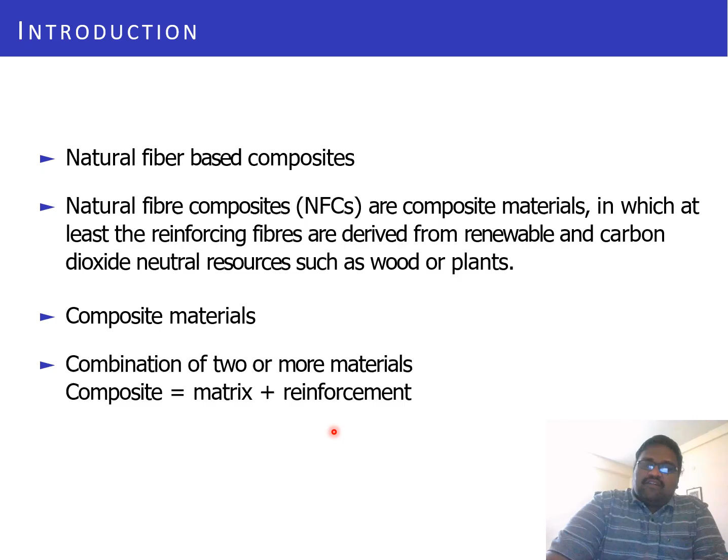Now let us quickly see how composites are derived. There are various types. The first one, MMC, which is none other than metal matrix composite.

The second one is the polymer matrix composites, PMC. The third one is the ceramic matrix composites, CMC, and these three are based on the matrices. Please note these three will be based on the matrices, that's why the matrix term is involved here.

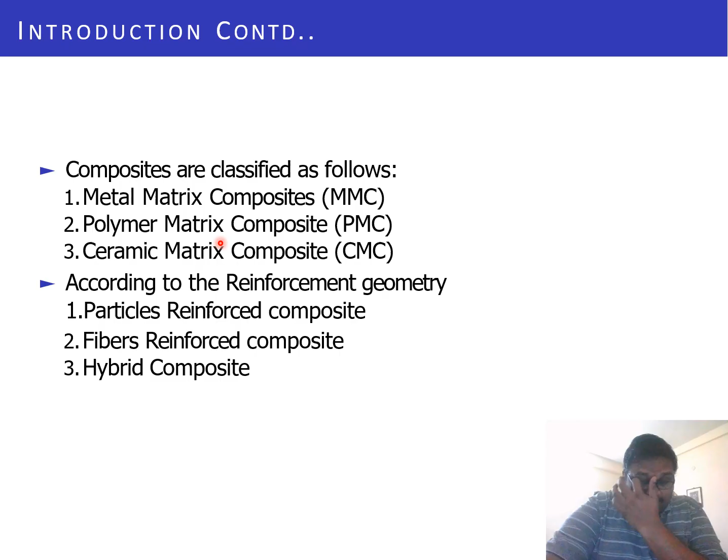The polymer family, you can use a polymer family composite. Then metal matrix, you can use the matrix as different metals derived from various sources. Then this is the ultimate need of the hour, the ceramic, which has high heat resistant capability. But the difficulty in the ceramic matrix is the challenge in the fabrication of the composites. Even though researchers overcome that, quality research is still going on using ceramic as the matrix, which is ultimately the strongest one and has the capability for high heat resistance.

On the other hand, our team focuses on this one. We are more familiarized and expert about the behavior of polymer composites. We worked on using different polymers such as unsaturated polyester. Epoxy is the strongest one, which has high density. Then we have vinyl ester.

Apart from this, we have some quality biopolymers out there like polypropylene, PLA, polylactic acid. All these things come under the biopolymers in such a way that we are able to generate good biodegradable materials. So focusing on the biodegradability concept, we have to go for using those kinds of biopolymers. Most of the biopolymers undergo some chemical processing and are readily available in the market.

Since we basically belong to mechanical expertise, we don't go for deriving our own polymers by adding various compositions. Normally chemists are doing that one, that is their expertise towards that.

Then the next category, as I pointed out, is based on the reinforcement geometry - how the reinforcement you are going to use, how the geometry will be based on that. The first classification is particle reinforced composite. My research team, my research lab, focuses on 2 and 1, these combinations. Let me tell you clearly in my coming slides.

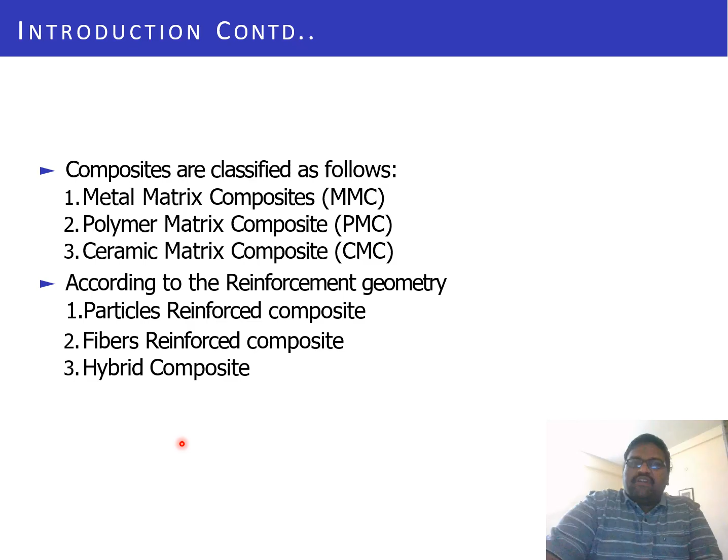Then the third one is the hybrid composites. As you are all familiar with the word, the terminology hybrid, that is the hybridization. You are going to combine one or two fibers, one or two materials, or you are going to combine the fiber with a metal in such a way that you are going to produce a fiber laminate. So all these items come under the hybridization concept, the hybrid composites.

Then the next focus of this lecture session is about the mechanical properties. As specialized persons, we are going to focus on the mechanical performance of these natural fiber based composites. So the mechanical characteristics refer to the various properties and how the developed composite material is going to react towards these properties. Under the mechanical characteristics, the four properties that as researchers we strongly focus on are the tensile strength, the flexural strength, the impact strength, and followed by the hardness.

Let me explain one by one. What is the tensile strength? The tensile strength is none other than the ability of my composite material to withstand the pulling force, to withstand the pulling load. So here I am going to subject my developed composite material to tensile studies, and I am going to discuss how it performs when the load is applied, especially the pulling load. Pulling load in the sense, how we are going to test the specimen is: one end of the specimen is tightly fixed in the grip, and the other end of the specimen is attached with the top load transducer, and now the load is applied.

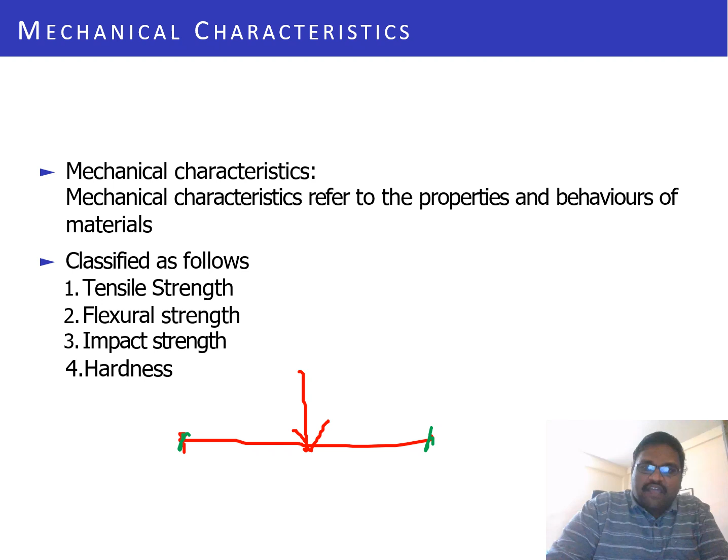Now the flexural, what I am going to do is carry out a 3-point bending test in such a way that I will keep my specimen like this. This is my specimen, and at the center I am going to apply the load, and these two ends are fixed. So that is said to be the flexural load, where it indicates the 3-point bending test. Later on your specimen is subjected to bending, and at one point the fracture will happen. So that is said to be your flexural strength.

Okay, the second one. Then the third one, the impact strength. Impact strength can be done by using two methods, Charpy method or Izod method. Only the direction position is changing, where you are going to keep your specimen either like this or like this. That is the two methods, Izod and Charpy. Now an impact hammer is going to come and crush your specimen, hit your specimen like this. So how much energy your material is able to absorb?

That is the ability of the material to absorb energy, said to be the impact strength. So this one is applied by means of a hammer, the force is applied by using a hammer exclusively. So that is said to be the impact analysis. How much energy your material is able to absorb, it is represented in terms of joules, since we are talking about energy absorption.

Then the hardness, we can normally go for the Shore D hardness, where by using a Shore D hardness tester, I am going to keep the tester over my specimen like this, at different points like this, and the hardness tester will show the value. I am going to press over the specimen surface in such a way that the indenter attached with the hardness tester will measure how hard the surface is. Surface roughness is a different tester. So how hard the surface is, it will show you the value. That way we use the hardness. Here it is a unitless value, we are going to give it in numbers, example 10, 15, 20, like that.

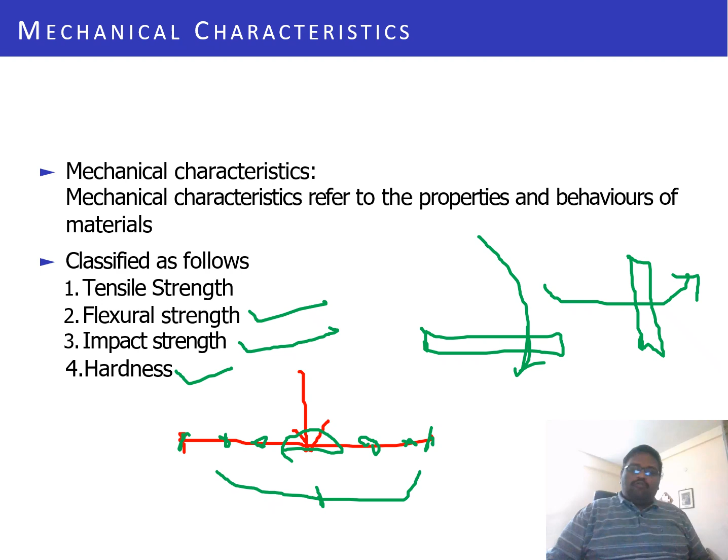But apart from this, we have done studies on erosion also. So in my coming slides, I am going to discuss the results, how we are getting interesting results, based on which you are able to take it forward. You are going to utilize the different machine learning approaches available for your work. Okay, so now let me move on to the further introduction.

And we can use these composites; knowing which type of industry to focus on is very important. So household, structural, aerospace, automotive, construction, and sporting goods are there. In sporting goods, many of the items are nowadays replaced by natural fiber composites. In fact, our lab team members tried one small mini skating board for kids, and it came in a very fine shape. But unfortunately, after a specified time period, it got fractured.

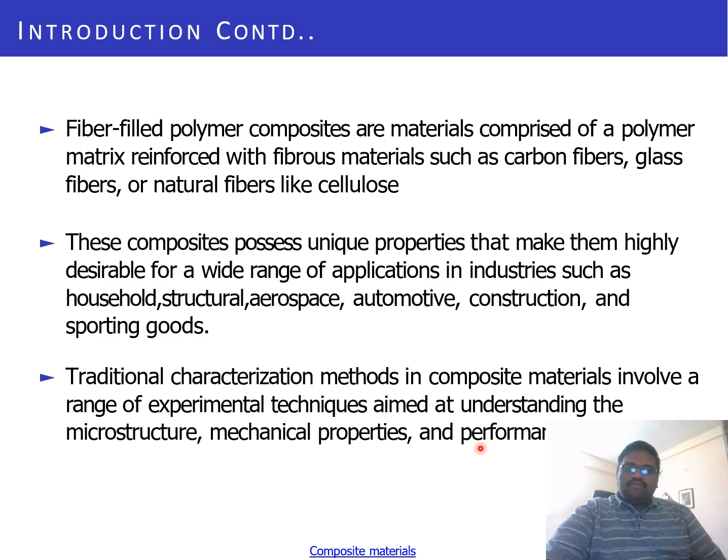So we will face some challenges to make it a commercialized one. And also at the time I didn't get enough good industrial support. That is also a challenge. Okay. And as I told, in the traditional characterization methods, researchers always focus on doing experimental studies of tensile, flexural, and impact. Then they take the failure portion and subject it to scanning electron microscope studies, through which they are able to understand the microstructure, and followed by that the performance of mechanical properties.

Now, in the present day, the industry's major focus is to minimize the use of non-renewable resources and adopt eco-friendly materials by waste use and waste recycling. And the industries are in desperate need of minimizing material waste, because all of us know that material waste will be a very big challenge financially. So we have to be very careful, and that is the current industry requirement. Now, for this, polymer and natural fiber composites are going to be the ideal material, the right choice.

Why? Because they address reusability, they address recyclability, and they tick the box of long-term constancy and widespread accessibility with a very reasonable cost. So these checklists will all get ticked by means of your polymer with natural fiber composites. That makes it the greatest of all time till today.

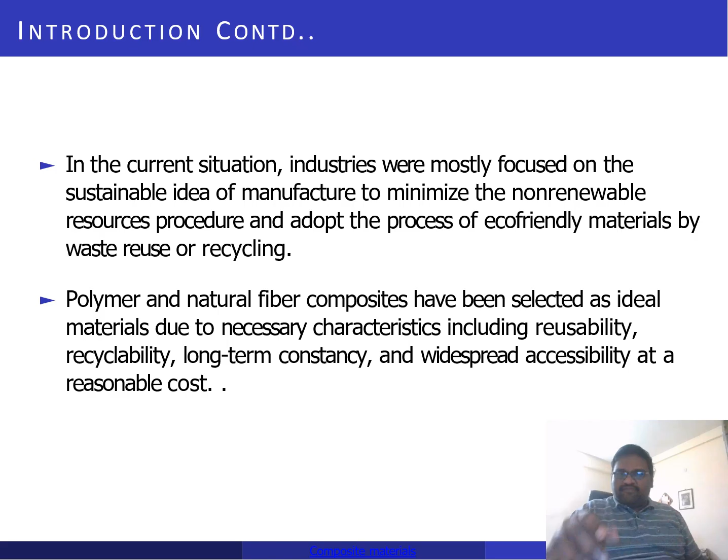Even though lakhs and lakhs of papers have been published by researchers, still the thirst for this combination is there, because day by day new technology is coming. We are in desperate need of new materials with interesting performance. So to satisfy those needs, this combination will exist for another decade also. Who knows? Yeah. Then let us move to the key discussion.

So right now I discussed broadly the composites and the different types, and our focus is on natural fiber and polymer composites, and the property focus is on mechanical performance like tensile, flexural, impact and hardness. Now, how to analyze this using the machine learning approach? First of all, I will give you a brief background about the machine learning approach. It's a huge umbrella under which a number of sub-techniques are there. So we are going to use different techniques from which I am able to understand which composite combination is the best one.

So for understanding this, first, whatever the algorithm, whatever the technique under the machine learning approach I am going to choose, I have to train it with my requirement. If I directly feed, okay, it is not like our calculator. If you put 4 multiplied by 6 and press equal to, it doesn't give 24. It's not like that. First you have to train with your data sets.

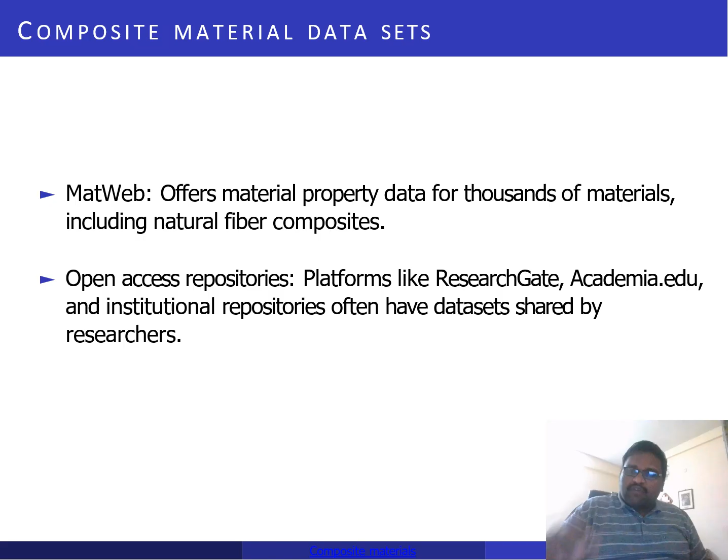And you are all familiar, of course many of you are using this or about to use. ResearchGate is there, Academia.edu is there, Scopus is there, Google Scholar is there. Okay, and by means of more open access, gold open access channels, you are able to get the full paper through the channel portal itself, from which you are able to get the data sets. That data is also with the proper permission. If you want to use other data, the data will be provided by other researchers. All happens in a more ethical manner.

That is very important. And for performing these machine learning approaches, some key papers that I would like to present to you. I don't take much time on this. Just quickly I will throw some inputs. Later on you can also refer to some better papers. In my work line, this earlier published research is very much matched.

So the first one is about the prediction of macroscopic mechanical properties and microscopic cracks. See here the machine learning approach they used is the DNN method, that is coming under your machine learning as a regression model method, and they compare it with the RVE method, and we also used this RVE. Later on I will show you my results, how we obtained them. Okay, so here they are focusing on the cracks, I mean failure aspects, but purely the mechanical property.

Likewise, in the year 2023, another key paper was published using natural fiber reinforced plastic composite. Very interesting. And here they use the deep multi-layer perceptron technique. Interesting technique, under your machine learning umbrella. So here the MLP, sorry, MLP, multi-layer perceptron.

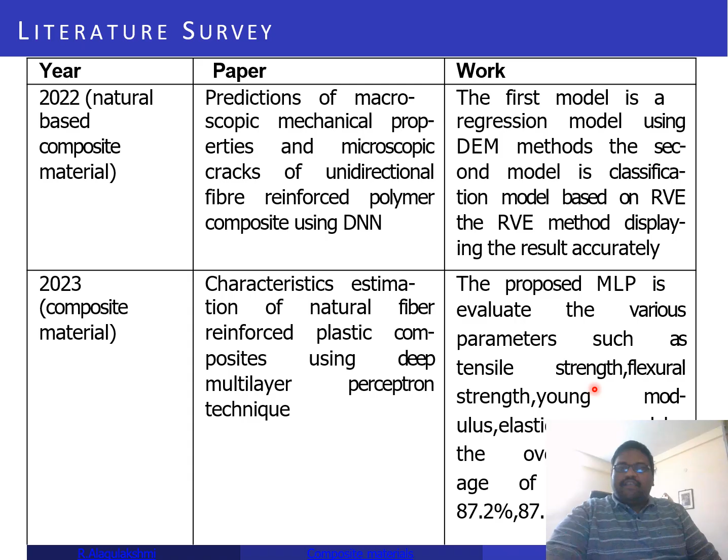It's used to measure the various parameters as we discussed, the tensile, flexural, Young's modulus. Young's modulus and elastic modulus are derived from your flexural and tensile studies itself. Of course, they are closely related to one another. And you see the improvement in percentage they have mentioned, around 87.2, which is quite interesting. That attracts us in our research to use some quality machine learning approach.

And another paper published in the year 2022, where they used the ANN. Please note ANN also comes under your machine learning approach. That is BPNN, SNN, ANN, I mean artificial neural network. Here also they predict the mechanical performance for the green composites, green fibers. This is what I had mentioned as the biocomposites, where they used this type of green fibers for better composite manufacturing. And they used two types of methods, BPNN and SNN, and they focus on three mechanical properties.

And you see the results of accuracy. One of the most important things of the machine learning approach is you are able to compare your experimental results with the results derived through the machine learning approaches.

That is the accuracy compare. So here the accuracy is very good, 96% is there. Then in 2020, based on the polymer composites, how the machine learning is applied. So I am very new, I am late. Right now I am focusing.

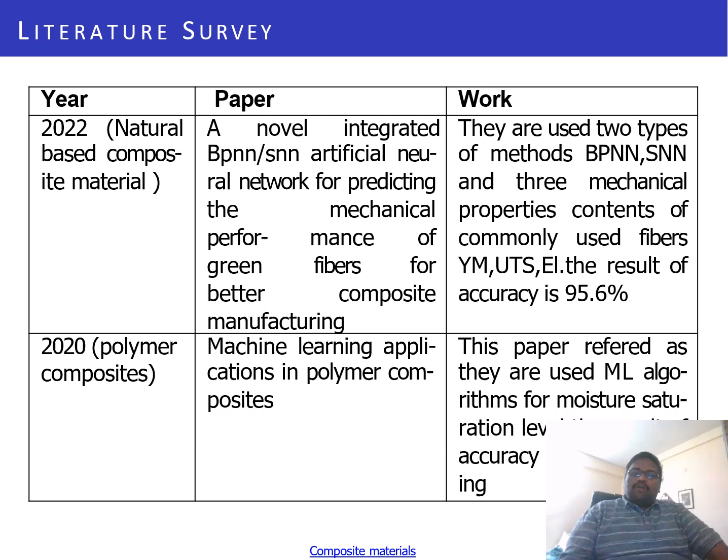But you see, earlier researchers started hardly 5 years back, half a decade back itself, they started using the machine learning approach for polymer based composites. So they used the different algorithms focusing on moisture saturation level, and they also understand a good accuracy. Then the next one is based on the basalt fiber. Here they use SVR method, all those things.

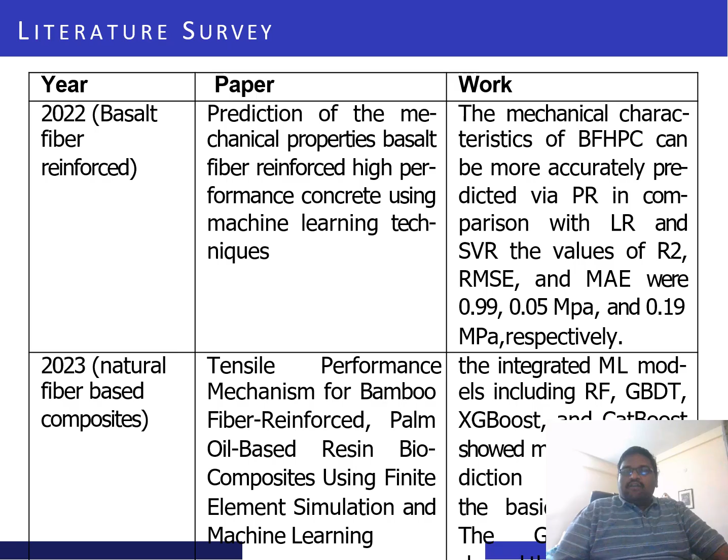Then another one is for the bamboo fiber reinforced and palm oil based resin, like that. They use along with machine learning the finite element method also, through which they are able to compare the experimental results with the theoretical ones. And the next one is another unconventional approach, using the CNN approach, the convolutional neural network. That is another interesting one that also improves the accuracy, gives some good efficiency from the results we are able to understand.

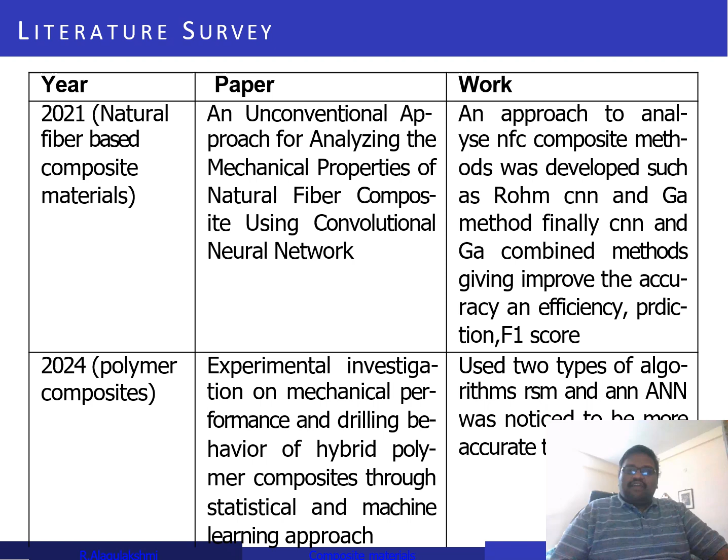Then another one published in 2024 focusing on the machining aspects. That is also very important when we focus on developing innovative products, where the machining also is a part. So that also to understand from the literature.

Now the next interesting thing is, what are all the gaps that we are able to understand based on the literatures that we come across. That is, the lack of real-time analysis is very much missing in the case of natural fiber composites. Okay, and this one will be done by means of your machine learning algorithm. So from the literature, purely with natural fiber mechanical performance alone, and with natural fiber mechanical performance and the machine learning approach, this set of literature. From that we are able to understand the machine learning approach performance.

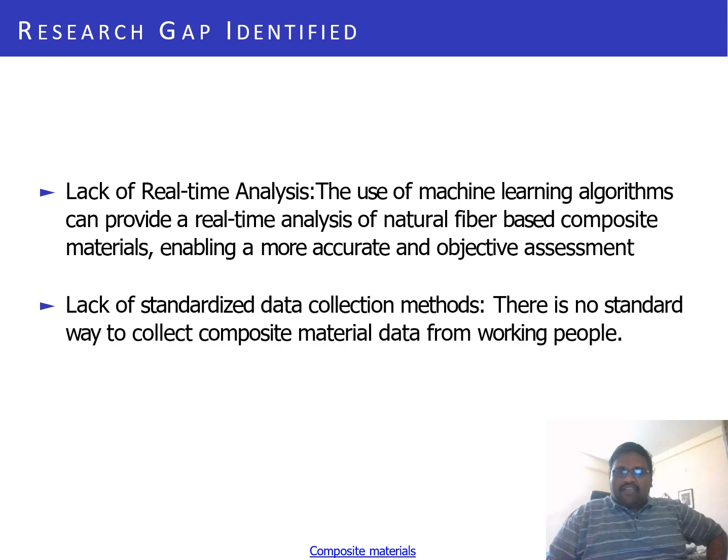And the lack of standardized data, there is no standard way to collect composite material data from working people. This is what I told you, the challenge we face is getting a larger amount of data. Okay, that is the challenge. And what motivation makes us start doing this, that is involving the machine learning approach in the natural fiber composites.

The first one is the high specific strength. As I told you many times earlier, the composite material possesses a better strength when compared to relative density. So this makes them suitable for lightweight applications where the strength is critical. Then the second one that makes natural fiber based composites more interesting is the cost effectiveness. When compared to synthetic alternatives, as I told, glass fiber is the very strongest one. The composite developed from glass fiber, but the glass fiber comes under the synthetic.

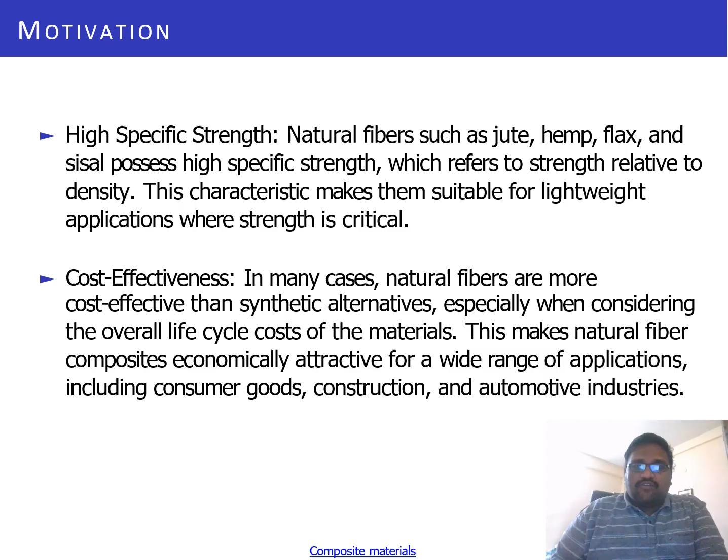So now the alternatives, in terms of strength, are also equal to your synthetics. Okay, and comparing the overall life of the composite material, this makes natural fiber composites more attractive. That includes consumer goods and construction. Yes, of course, I would like to highlight that in the construction sector nowadays more natural fibers are used to improve the quality of wall structures. And in fact people started building houses completely using polymers. Then of course another big sector is the automotive industry where we are using the composite materials.

And this is the objective of our research: to predict the mechanical properties using supervised machine learning. Different techniques we adopt, from the literature only. As a mechanical background person, I am not right now able to develop my own algorithm. As I told, I am in the preliminary stage. Our research is the fundamental one. So by taking the algorithm from the literature, I am going to apply it to the mechanical performance analysis. Then, by using the SEM images, we are going to carry out unsupervised machine learning, and we are also going to carry out deep learning analysis.

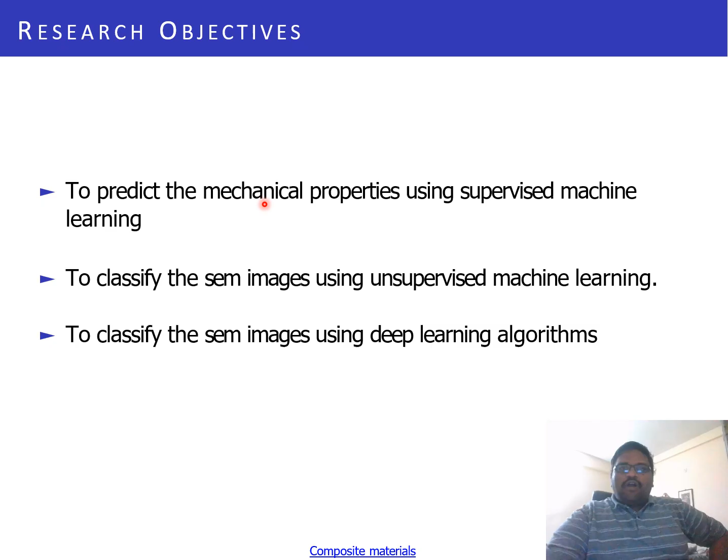And I am going to focus on the first one. The remaining two, based on the time, let me try to cover. For this, I have complete case studies. The remaining two, due to the time consumption, and also we are doing further research focusing on this, I don't have enough results at this juncture, so I will focus on the first one. Yeah.

So let me move on to case study one. In case study one, what we did is we gathered the data of different natural fibers. And for your kind information, since I have been working for more than a decade on natural fibers, right now I don't take any data from the available data sets or online sources. It is our pure original data that we take for the different natural fibers on which we have already done some research, jute, hemp and flax, along with different polymer matrices, as I told, epoxy, polyester, polypropylene.

Okay, and that data mainly focuses on the tensile strength, flexural, all those things. Now, after we ensure ourselves that the data set is ready and what properties we are going to focus on, we are going to focus on four properties. Then we have to decide which type of machine learning approach we are going to choose. So we are going to choose the SVM approach, and decision tree for the classification of various properties,

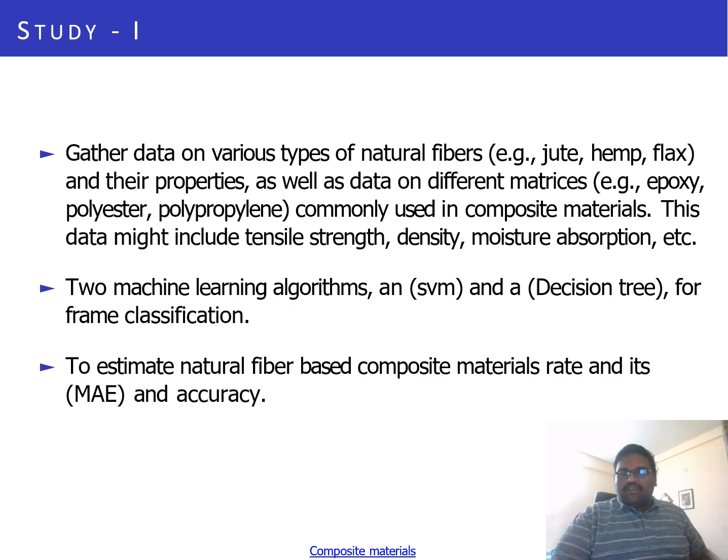from which we are able to obtain a better one. And from this, the outcome we expect to get is the natural fiber based composite material rate and its mean absolute error, and finally the accuracy. The MAE value and how accurate the produced results are, that also we are able to conclude by using this algorithm. And this is the block diagram as I showed.

The polymer composites using different natural fiber and polymer based composites, and the mechanical properties we focus on are tensile strength, flexural strength, and impact strength. All this characterization was done, and we have the data sets. So the input data of different property parameters such as tensile, flexural, and impact strength is given. Then we carry out the machine learning analysis using the SVM method, SVM or decision tree, then evaluate the different composites and compare with the accuracy.

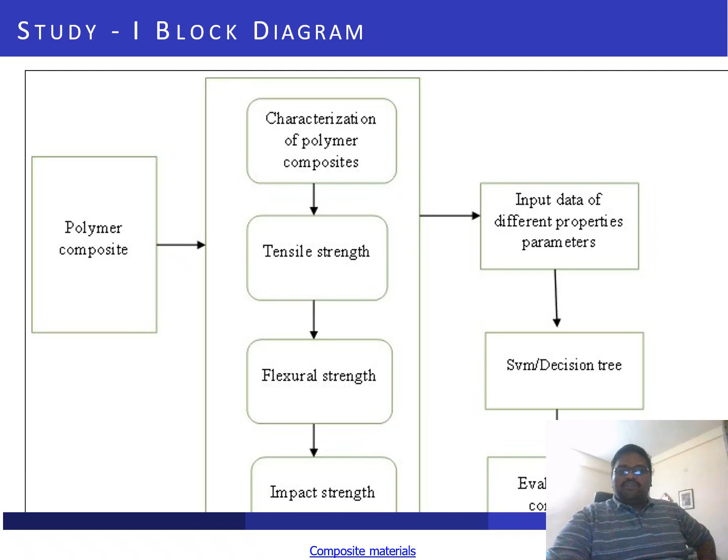Okay, and the material properties in case study one, let me tell what combination we have used: we don't use the natural fiber. Up to my previous slide I generally focused on that one. Now from this slide I am going to focus on the key results that we got. So now the combination I am taking is biochar, which is derived from various waste. The first waste is cashew nut shells. We all take cashew as snacks or for cooking purposes.

Now the cashew is taken from the cover as a seed and utilized for different cooking purposes. The remaining outer cover is thrown away as waste. Now I am going to take that waste, the cashew nut shells, and subject it to the pyrolysis process. I am going to heat it in the absence of oxygen at a temperature of around 500 degrees Celsius, and at this juncture it creates biochar, which possesses good mechanical properties that ultimately make it a good alternative to existing materials.

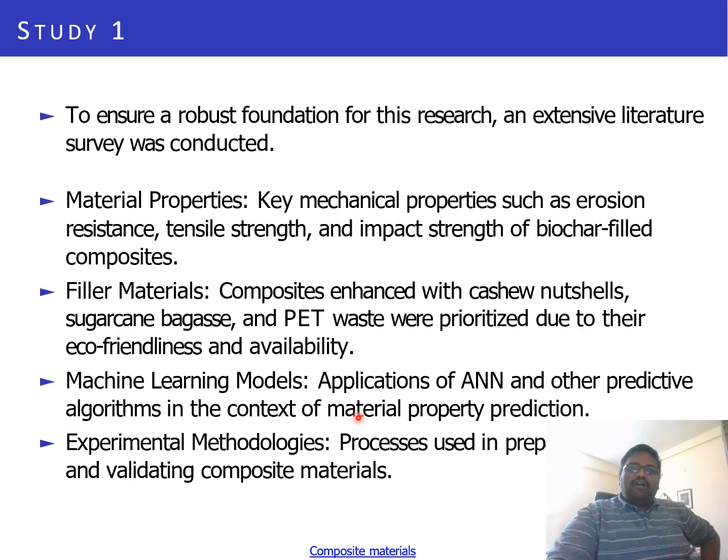Okay, and the experimental methodology used is that we are going to process the biochar with polymers, and we are going to validate the tensile and impact strength of the composites. Now, this table shows the interesting data that I showed, which we used for training.

Now for the different types of biochar mentioned here, cashew, PET, and sugarcane. As I told you, the composites are prepared in three different ways: 5, 10, 15. Now, these 5, 10, 15 values I am going to provide as training data, 18. From that, 12 data are subjected to testing, and out of which 5 are validated. Likewise, for the next combination, the third combination, the different preliminary stages of training, testing, and validation will be done.

From this, what I am going to obtain is the hidden combinations. For example, for this combination, cashew, I told 5, 10, 15% values I am having from the experimental result. Now what is the 6%? What is the 7% value? How much? 8, 9, 10, like that. Like that, we are able to understand the different weight percentages using the machine learning approach. That is the very big advantage of the machine learning approach.

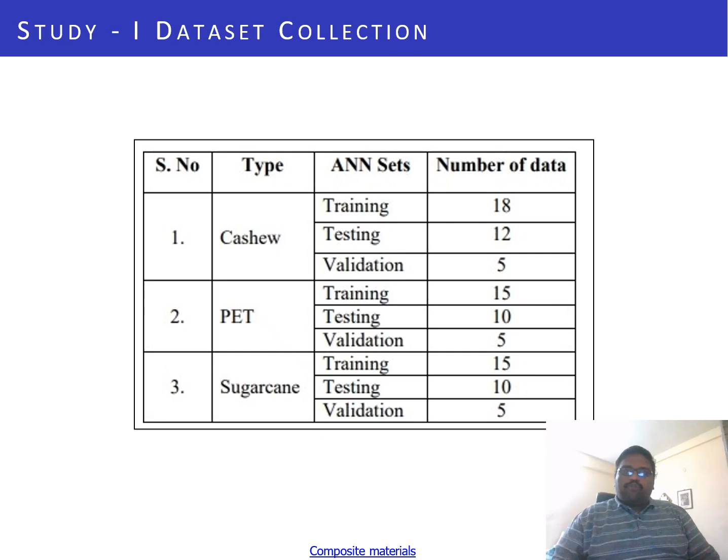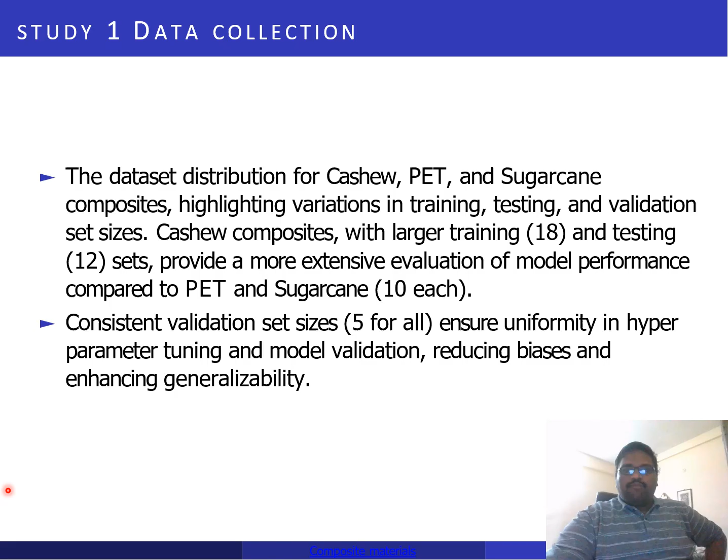So we are able to understand the hidden combination that possesses some interesting properties, good properties, enhanced values also. Okay. So as I told, in the data set shown in the previous table, training, testing, and validation set sizes are given. And here we have the larger training data for cashew composites that provide extensive evaluation, and consistent validation set sizes, 5 for all. This should be maintained uniform in order to ensure the results we got should not create any kind of confusion. So it reduces the bias and enhances the generalizability.

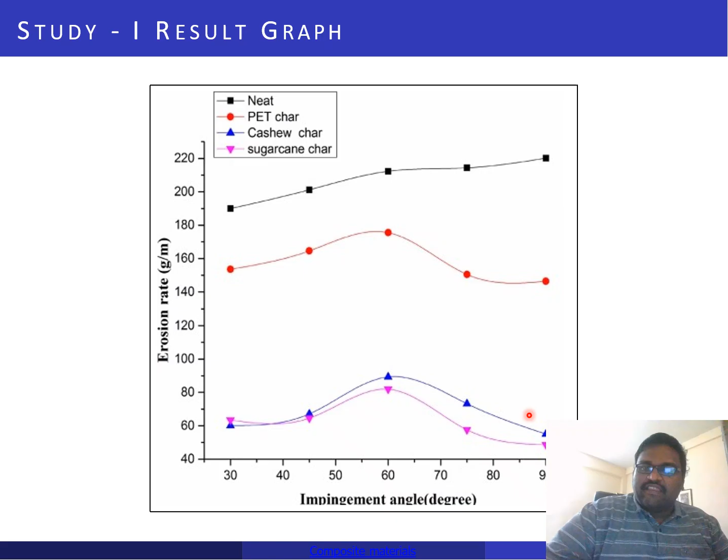So you see, this is the graph for the neat. When the impingement angle increases from 30, 45, 60 up to 90, there is a slight increase in the erosion rate in the case of pure polymer. In the case of the developed composites, better resistance is provided at 45 degrees. Then there is a dip in all three cases at 60 degrees. Followed by that, when the angle goes on increasing, the trend decreases drastically. That is, it possesses good erosion resistance.

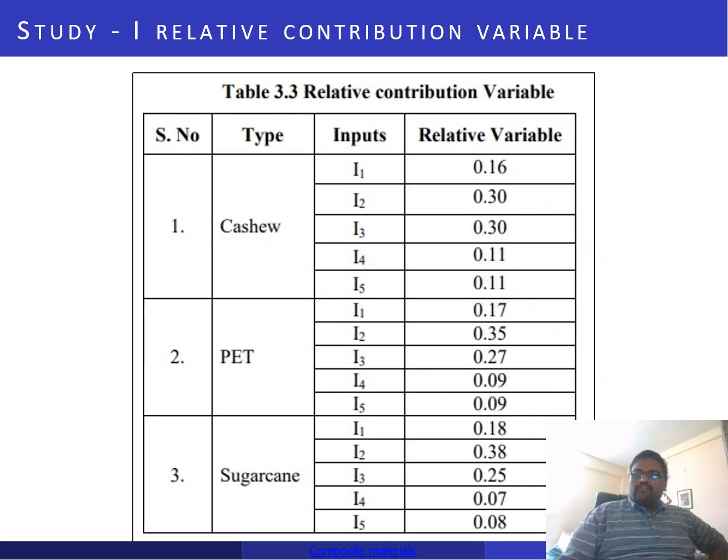Okay, now we introduce this erosion into the machine learning approach, and we find the RCV, that is the relative contribution variable. I1, I2, I3, I4, I5 are the 5 different inputs given for the 3 sets of composites, cashew, PET, sugarcane, and these are the different relative values that we obtained, which are quite good, less than 0.5. It should be within 1. From this relative contribution study, we are able to understand that I2 and I3 are the most influential variables in the case of all three composites.

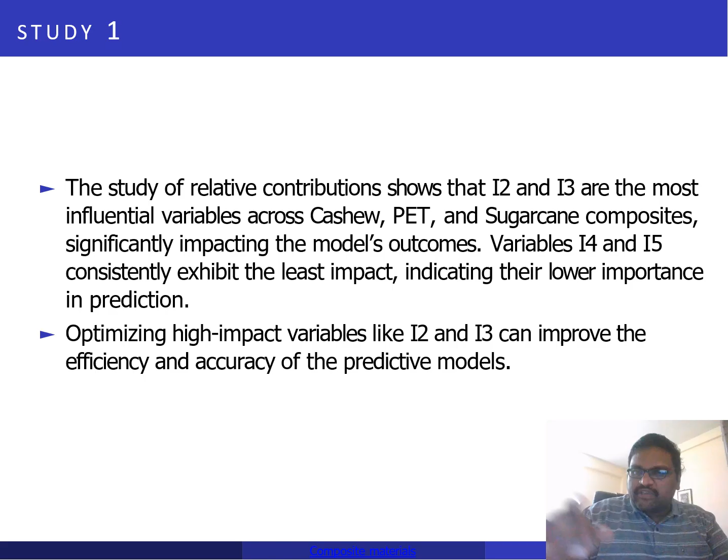Whereas the variables I4, I5 exhibit the least impact. That means their prediction is lower, their prediction is not good. Optimizing the high impact variables I2, I3 can improve the efficiency and accuracy of our predictive model. This is what I told: we are able to get better optimized combinations. I1, I2, I3 indicate the different weight percentages, as I have been telling you from the beginning.

Then the ANN model evaluation comes into the picture. For the cashew-based composite data, it creates a strong correlation, which means it is highly effective in predicting the erosion rate based on the provided input parameters. On the other hand, the PET-based composites model shows a similar strong correlation, but compared to the first one, cashew, it is a little low.

Here also the suggested input properties are well aligned with your prediction. Then the third one is the sugarcane based material, which has the lowest correlation coefficient among the three materials. This indicates there should be some more variations between the training, validation, and testing, or due to the creation of noise that happened during the input-output processing and the input-output relation. We have to check that out.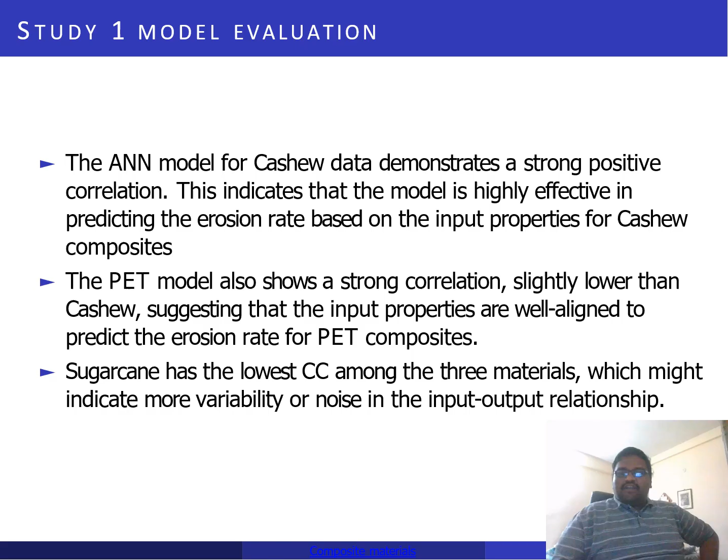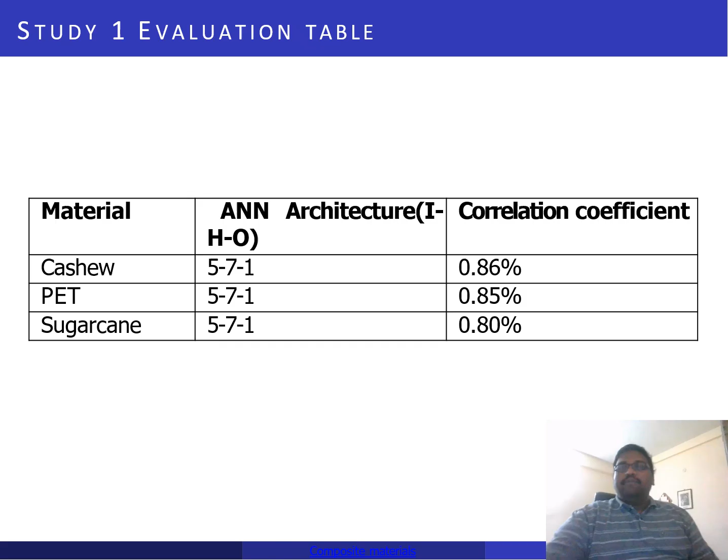This is the evaluation table for the different architecture combinations for the three sets of materials we are using, Cashew, PET, sugarcane with the architecture IHO 571, and the correlation coefficient percentage is obtained and presented here. As I pointed out in the previous slide discussion, the third property faces the lowest correlation coefficient of 80 percent only, when compared to the other two.

Now that first case is over. The second case I pointed out is carrying out unsupervised learning. I am not going to discuss this unsupervised learning with many pictures and results, I am just going to give you the overview, since I am going to focus more on the first objective as I pointed out.

The unsupervised learning is exclusively involved for analyzing the SEM images of natural fiber-based composite materials without requiring label data. We are going to normalize, adjusting the pixel intensity values to a common scale, then carry out noise reduction, because this affects the input-output relation. As we came across in the previous results and discussion, we noticed for the third type, sugarcane, the CC value is very low, which is exclusively due to the input-output correlation. We have to carefully notice all these things.

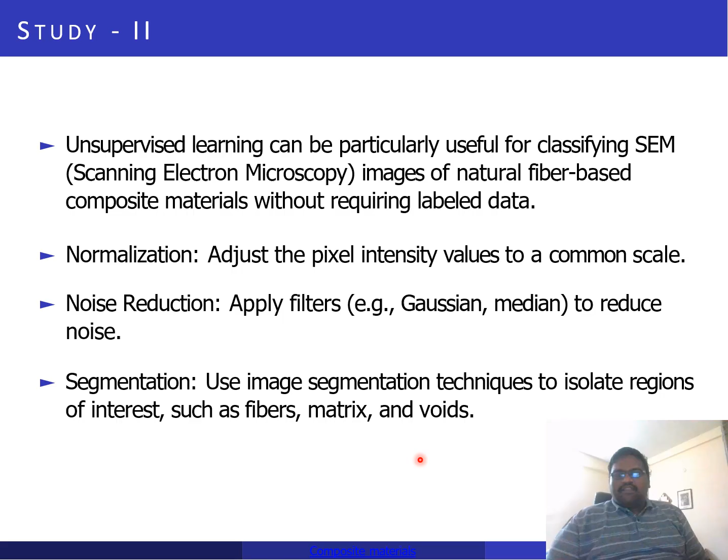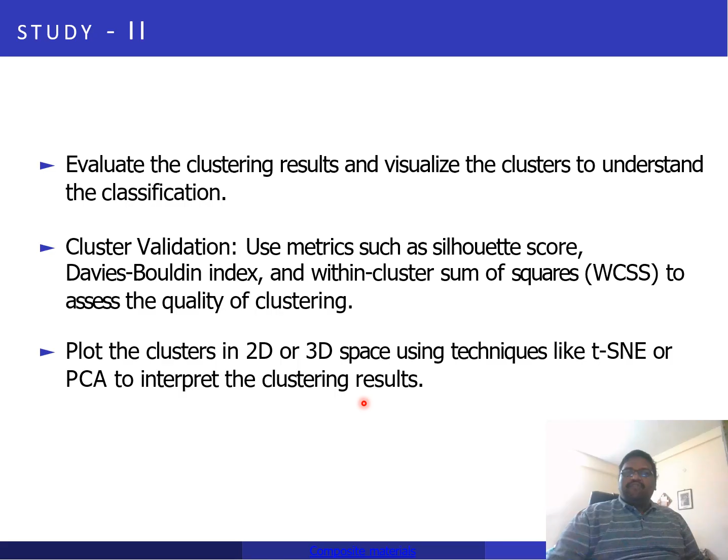The noise reduction done, then we have to carry out image segmentation to isolate which region the failure occurs, which regions give better results, like voids - that is also one factor leading to failure. Then evaluating the cluster results and visualizing the clusters. Cluster validation is also very important, using various techniques like silhouette score, Davies-Bouldin index, and others. This one we have yet to start and get good results. Then we plot the clusters in 2D or 3D space, for which we use techniques such as t-SNE or PCA.

Then the last one, the deep learning approach, we can apply over our SEM images, the largest data set of SEM images that we have on hand for the different composite materials. Here we have to ensure that the training is done properly, and ensure all the images will be given a proper label in terms of defining their material type, defining the defect present, and so on, so that during training the machine learning approach will understand, interpret, and give you the correct output results.

Then you have to do the pre-processing. The pre-processing stage involves resizing, normalization, and augmentation that includes flipping, rotation, etc., to increase the diversity of the data set. Then the next stage is splitting the data. You divide the data set into training, validation, and test sets, typically in the ratio of 70:20:10 or 80:10:10 - that is the recommended ratio to get better optimized results.

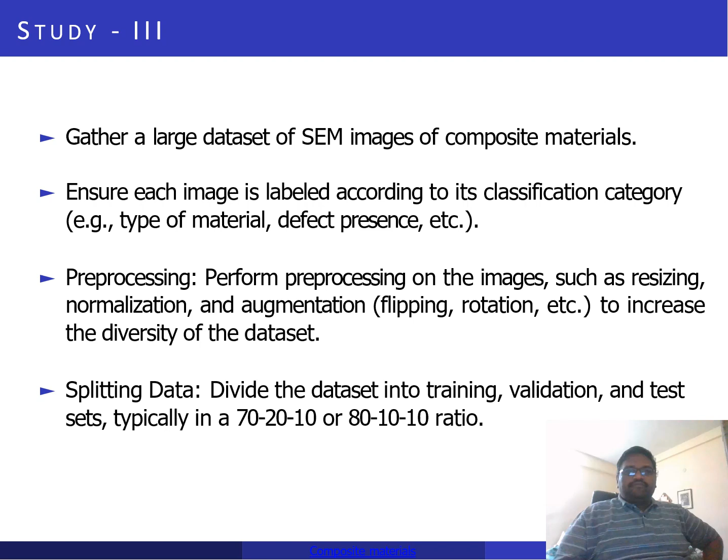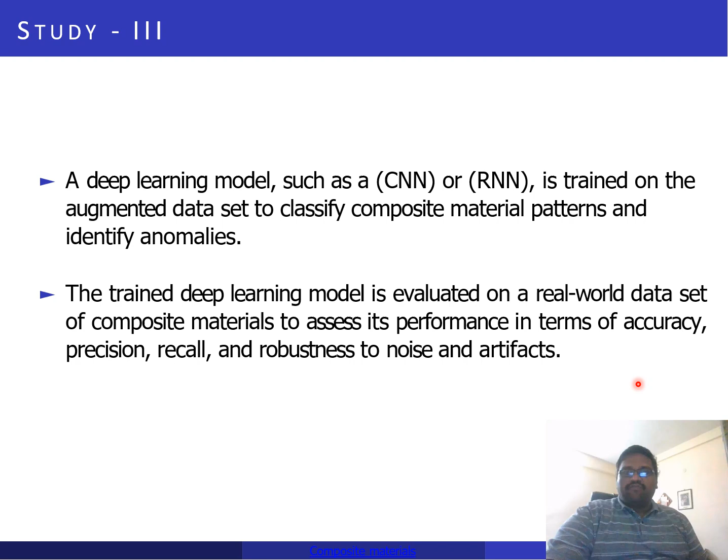Then for performing the deep learning analysis on the SEM images, you can use either a CNN model or an RNN model, where we train the models using the augmented data to classify which composite material patterns we are going to analyze, and to identify the challenges and anomalies. The trained deep learning model is evaluated based on real world data sets of composite materials, so that we are able to compare and assess the performance in terms of accuracy, precision, robustness, etc., to noise, artifacts, etc. This is the continuation of the study too.

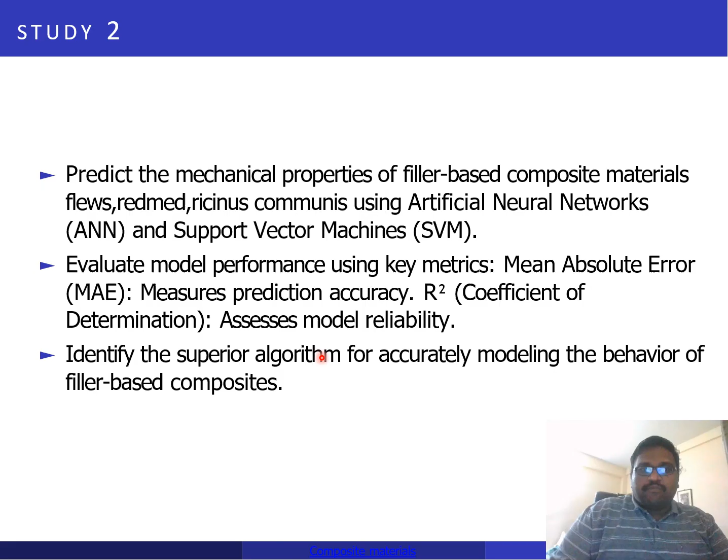We are going to use the artificial neural network and the SVM method.

This one I will skip, I will move to the next part, because there is some repetition in the slides. I'm sorry for that, that's why I skipped it.

Now let us move to the discussion on data collection. The testing will be done based on the American Society for Testing and Materials, and we have the experimental results. From these, the data sets are fed into the training.

Advanced data pre-processing helps make the data sets pure, which does not affect the outcome. Model training is done using the linear regression method, by which the mechanical properties are trained.

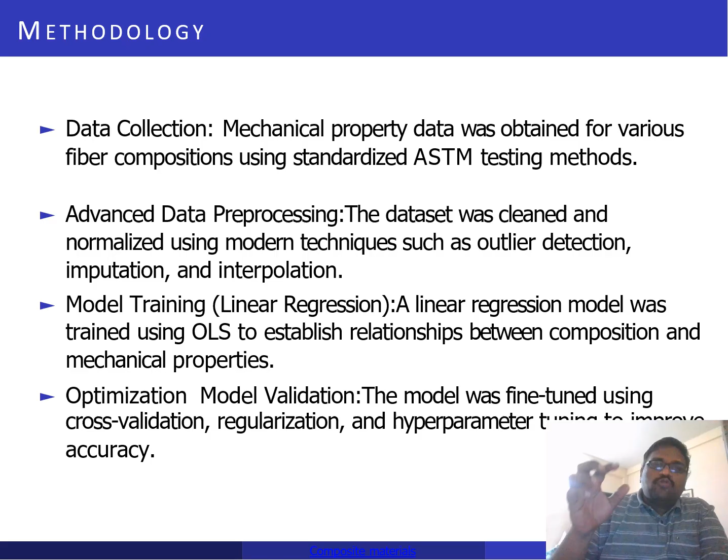Optimization of the model is also done - model validation, fine-tuning using cross validation, regularization, and hyperparameter tuning - to ensure we get high quality, accurate results. That is a very important step.

Then comes the prediction phase - the trained model predicts the mechanical property values for composition between 1% and 16%, as I mentioned earlier.

The percentages used for the experimental results varied between 5, 10, and 15 - not continuous, just these three specific values - which we gave to the training.

Now we are able to find the collection of percentages varying from 1% to 16%. That completes what we are able to analyze.

The model performance was analyzed using MAE, MSE, and R-square metrics. All the results in the coming slides will help ensure prediction reliability.

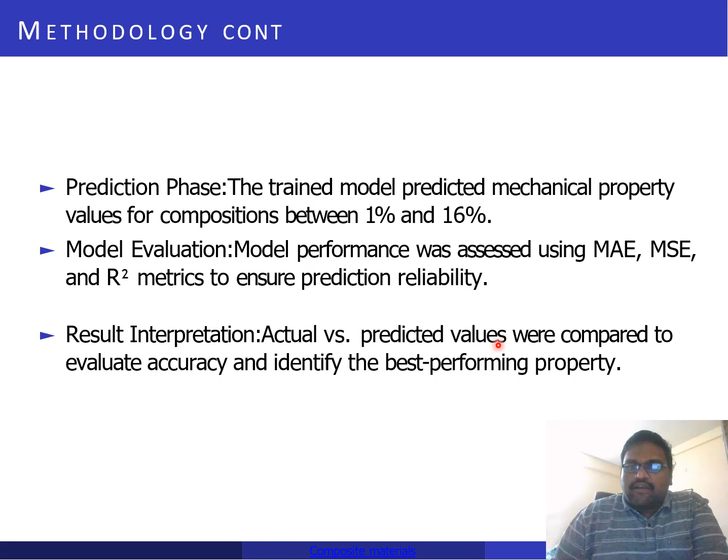This is the final stage in the methodology, where we interpret the results. The actual experimental results are compared with the predicted values to evaluate the accuracy and identify the best performing property.

This is a small block diagram showing the complete methodology: data collection, data pre-processing, prediction, and evaluation, including the comparison of both results.

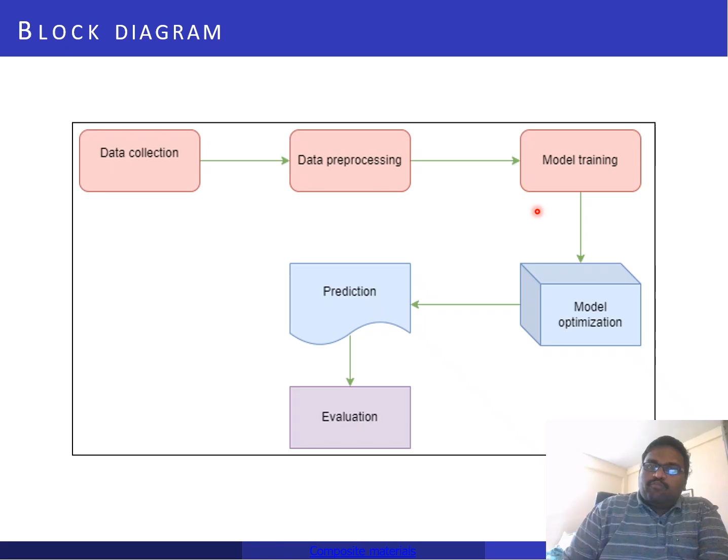In the data pre-processing stage, the very important steps are model training and model optimization. Only then do we enter the prediction stage.

We have a table showing values from 1% to 16%, where intermediate values are predicted since no actual data is available for large variation - as mentioned, we only have actual data for 5, 10, and 15 percent.

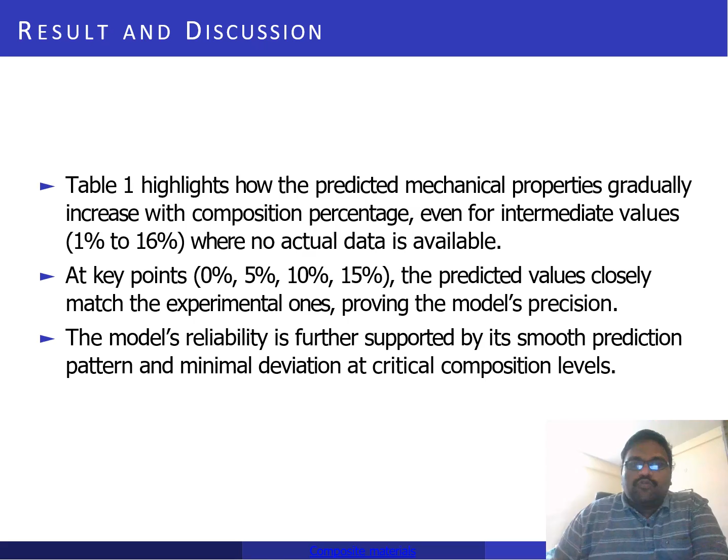For the hidden weight percentages in between, we are able to find that the predicted values closely match the experimental ones, proving the model's precision. The model's reliability is further supported by a smooth pattern and identification of a critical composition level. This is the complete result set.

Quickly, let me go through a few cases. For example, at these points we don't have experimental results available. The value I had from experimental results at 0% was 30. Through machine learning, the predicted value is very close, at 31. At 5%, the value is 47.92.

Here you see a decrease in the predicted value. At 10%, our original value is very close to the prediction, and in our case, we obtained good results through experimental studies specifically at 10%.

At 15%, interestingly the same pattern holds - from experimental we got 41, and through the machine learning predicted value we also got 41.

Now between 0 and 5, at points 1, 2, 3, 4, we don't have experimental results, but interestingly, through the machine learning approach I am able to predict how the values will be, helping understand if any good combination is hidden there.

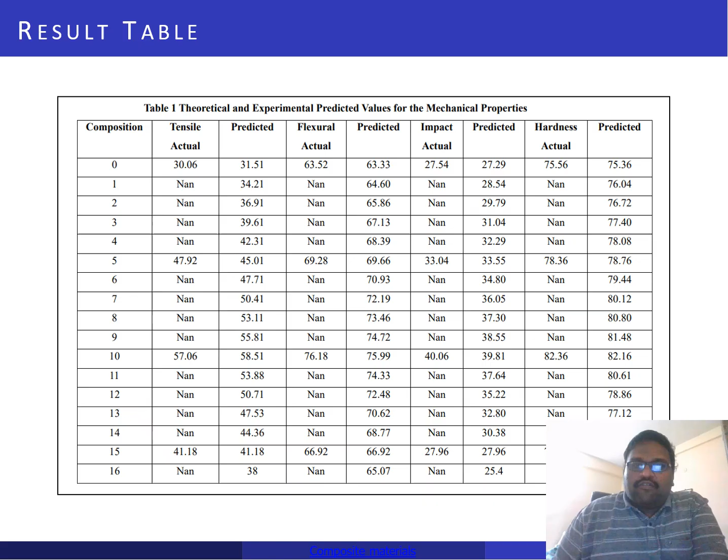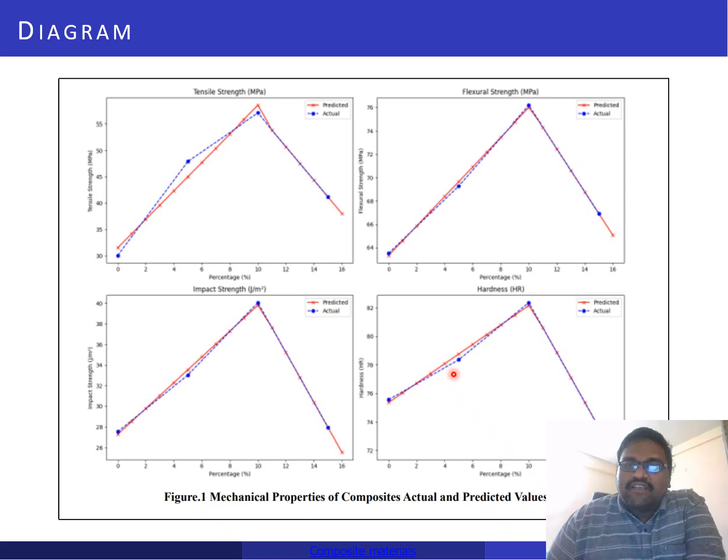Similarly for flexural strength, the mapping between predicted and actual is almost perfectly done, and also for impact. There is a slight variation in hardness, our last focus.

Our ultimate aim is to find this statistical parameter value, the mean absolute error, mean squared error, as I told you in the earlier slides, and the R square value. This shows how much our experimental results are close to the predicted ones, and how perfect the experimental work is. That we are able to successfully present by means of the machine learning approach analysis.

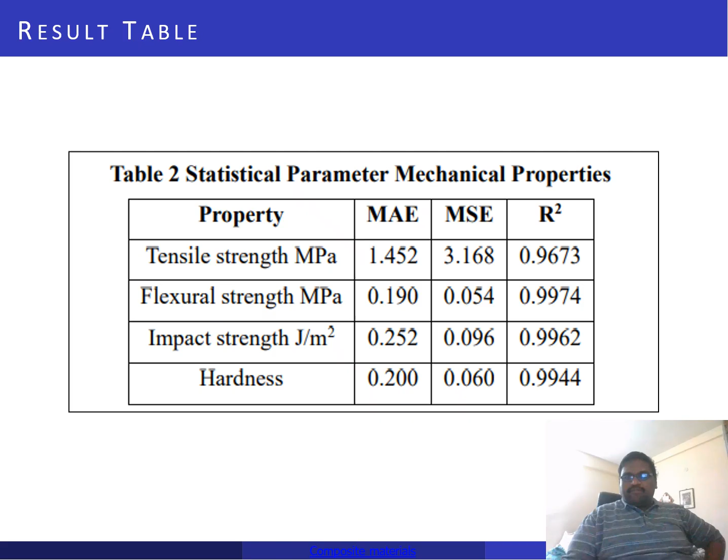So here you see it is 1.452, it is 3.168, the other values are closely good, and this is the R square value, which should always be 1. So if we take all the cases, 1 indicates the better results, better prediction of the theoretical with the actual ones.

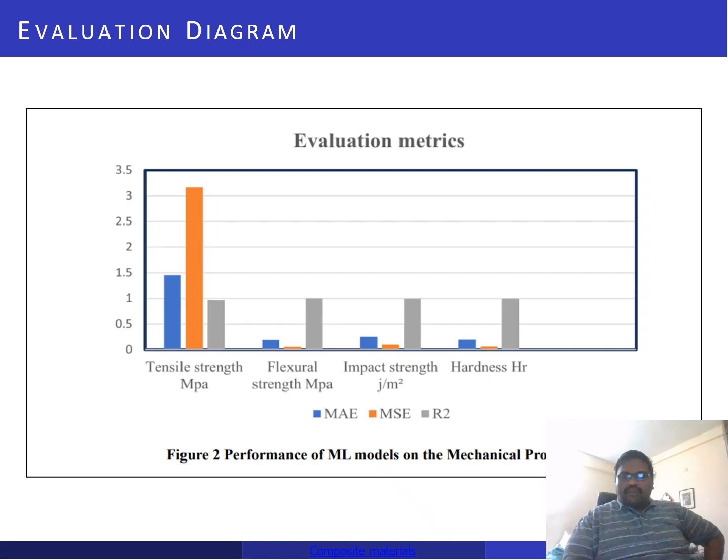Now the evaluation of mechanical properties is done with all the R square values closer to 1, that indicates high reliability. This is what I told. Tensile strength shows higher error, this is the drawback we noticed, but it remains within the acceptable limit. It doesn't go beyond the acceptable limit, otherwise we would need deeper discussion on this, but that is not the case here.

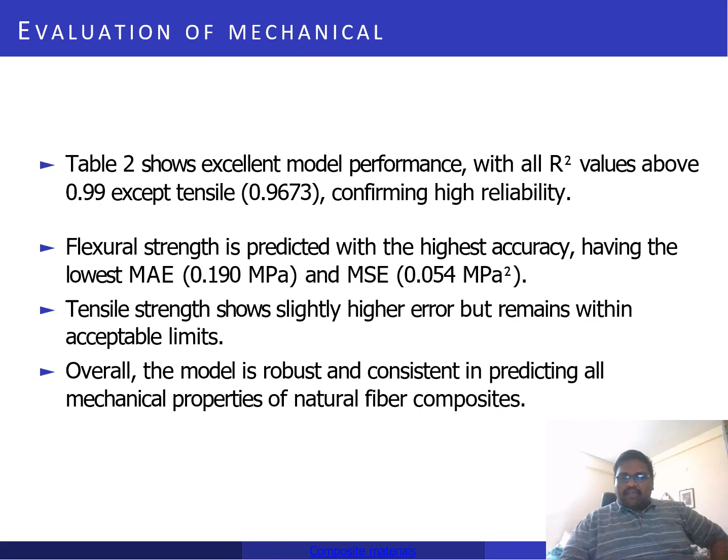Overall, the model we used is robust and consistent in predicting all the mechanical properties of natural fiber composites, both the SVM and the other one will be very, very good.

Let me move on to the last slides. With this, more than 1 hour, I discussed the fundamental usage of machine learning approach in different natural fiber composites. Let me conclude with the applications.